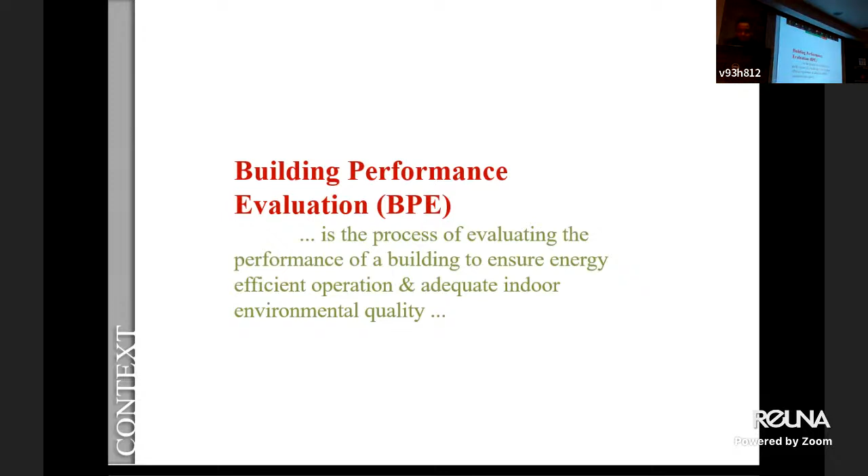So to answer this question, why we need building performance evaluation. To put things in context, in the context of this rapidly changing climate that we all are experiencing on a day-to-day basis, let's start with Chile's commitment to carbon neutrality. Sometime back, Chile announced decarbonization of its electric sector to achieve carbon neutrality by the year 2050. Okay, I'm sure all of you are aware of that.

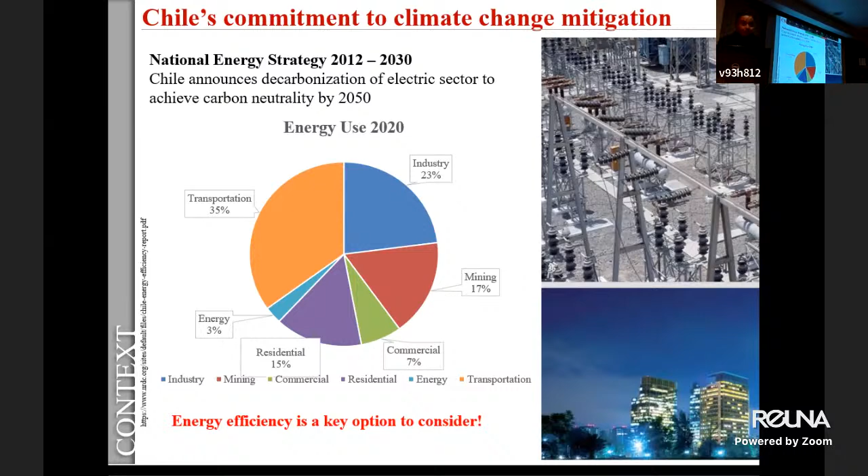So how does building performance evaluation fit into the context of building design process? Let's take a step back and ask ourselves, what is our prime responsibility as architects? I think our responsibility is to build efficient buildings and comfortable buildings. So how do you ensure that?

We have to put our hands around tangible issues and start quantifying the impact our design decisions make, both on the environment as well as on the occupants who inhabit our buildings. So all of a sudden, building performance becomes an objective equal to the more traditional items such as cost, schedule, quality assurance, and concepts such as research, simulations, calculations, energy modeling - all those things you do in your environmental control systems class now become core problem-solving tools that you can use to analyze data.

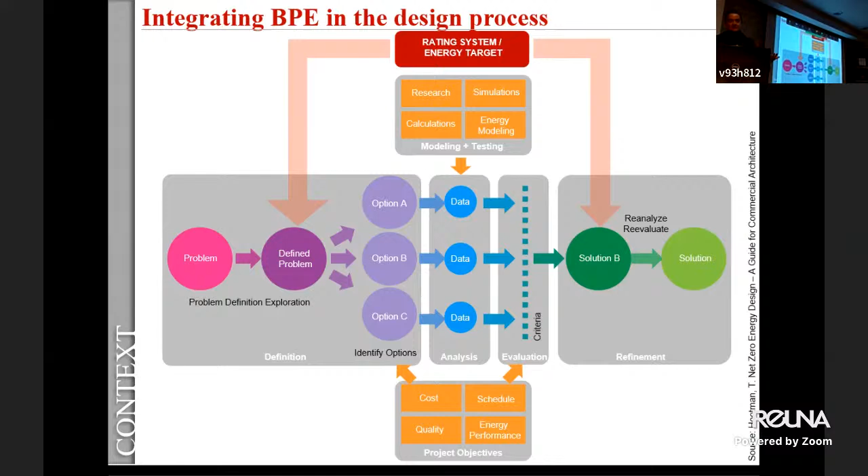There are various types of modeling software available to you to conduct simulations. For example, you have tools to evaluate climate analysis, to conduct climate analysis. There are specialized software that you can use to evaluate different aspects of building performance.

These include things such as evaluating the performance of a building envelope, evaluating the thermal comfort conditions of the spaces that you design, natural ventilation potential of your buildings, and daylighting potential of the spaces that you design. Then there are some extremely powerful software programs available to you that conduct whole building energy simulations at various stages in the design process.

So these are just some examples that you could use for your building performance evaluation. But mind you, the list is really not complete out here. These are just examples.

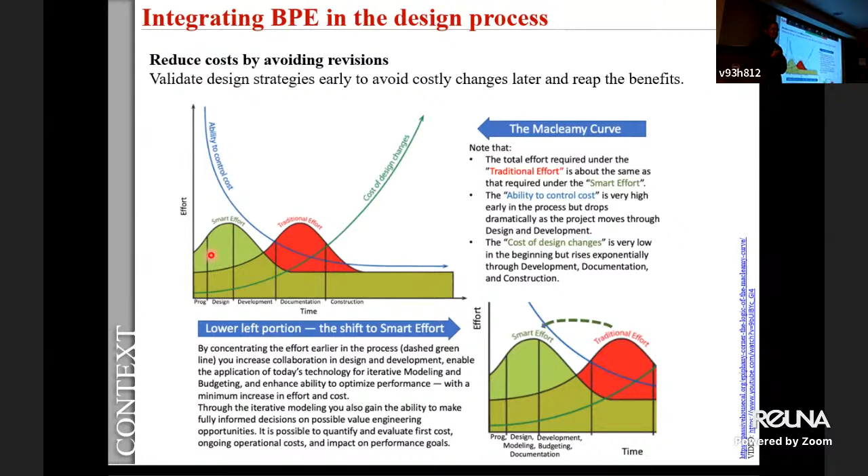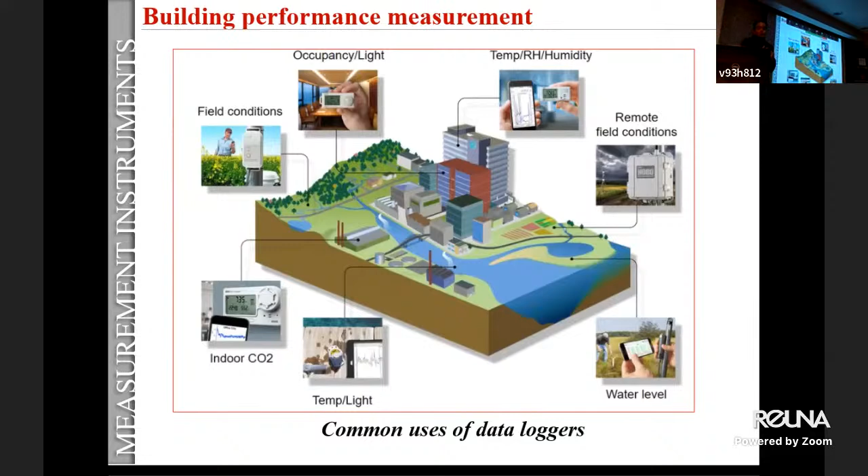You can also measure how a building performs, and for that you would need instruments such as meters and data loggers. For example, if you want to measure carbon dioxide levels, you can use this particular meter right here. To measure illuminance, you use what is known as a light meter. If you want to measure acoustical performance of a space, you use a sound meter. So these are different measurement tools, instruments, data loggers that are available for you.

And while there has been a considerable focus on measuring and regulating resource efficiency of buildings, there has been very little attention paid to the issue of how well buildings meet their design intents for occupants.

Building occupants such as yourself represent this wealth of information that tells the designers how well the building actually works. The challenge for the designer is to collect this information in a systematic and meaningful manner.

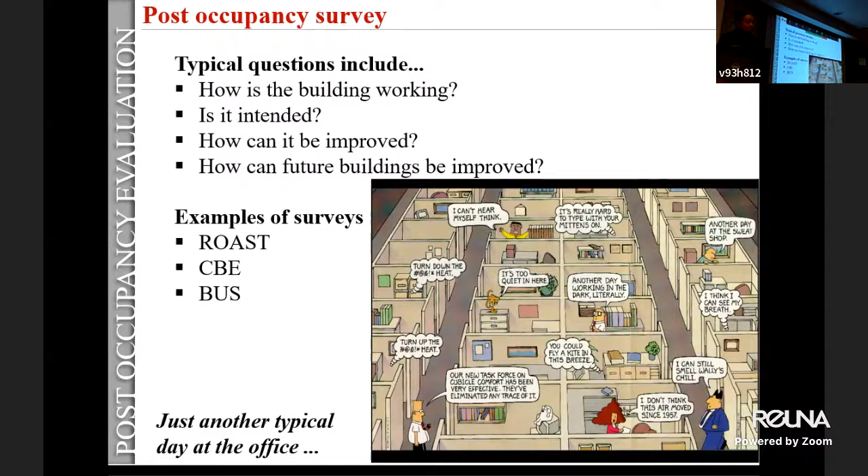So in order to evaluate occupant behavior in our buildings, we use what are known as post-occupancy evaluation surveys. Here is a note on one such survey known as ROAST, developed and maintained by Kieran Timberlake, an architectural firm based out of Philadelphia. ROAST lets you assess or evaluate thermal comfort in a workplace.

Through different questions posed by ROAST, it captures and maps occupant feedback onto your building's floor plan and provides you with visual data, which you can use to inform your design decisions and identify trends to make informed improvements.

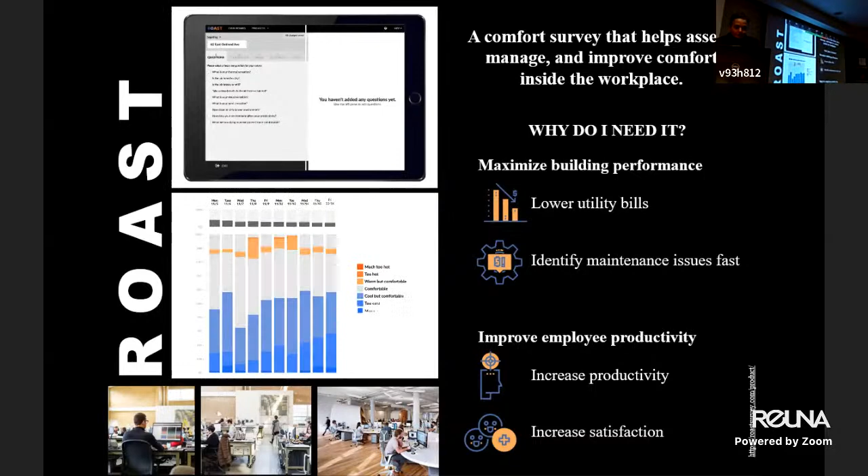You can also evaluate the performance of exterior spaces around your buildings, typically used in university campuses and urban areas. These spaces need to be designed and optimized both for use as well as enjoyment, and they come with their own challenges.

For example, you have climate, which can't really be controlled, so that complicates the assessment process. And unlike buildings occupied by tenants with a fixed profile, all sorts of people come and go in these spaces at all sorts of times, making user surveys extremely difficult to control.

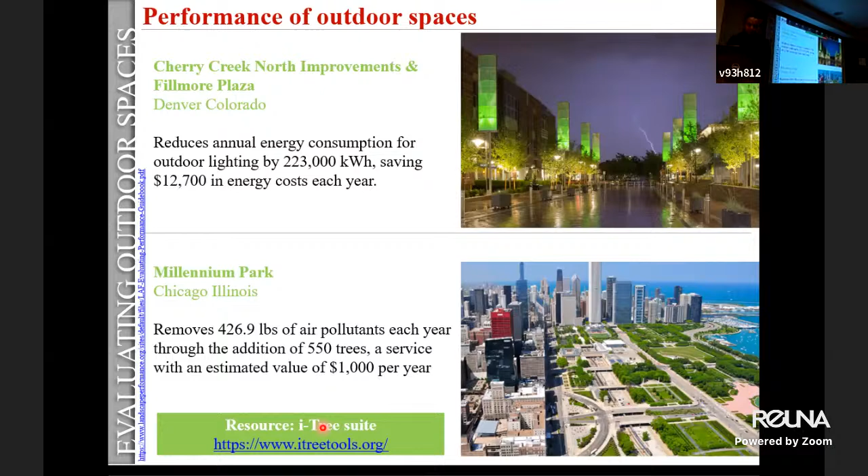Building performance evaluation is also extremely important in the green building design process. Design teams are actually required to conduct a building performance evaluation to demonstrate compliance with different rating systems. For example, to ensure energy efficient operation, more recent versions of LEED and the Living Building Challenge actually require

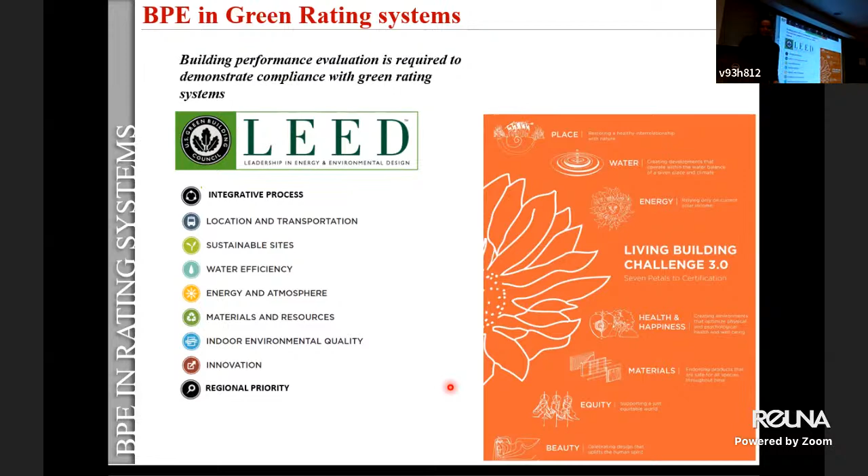actual energy performance of the building, in addition to the simulated or anticipated performance of the building. And it has to be demonstrated over a period of 12 months after the occupants occupy the buildings.

So in this next set of slides, I will show you examples of different building performance evaluation methods that we use to inform design decisions. Here is a project we did as part of the Green Team at Kirksey, for Houston Community College - the Learning Hub and Science Center.

This project is an example of how daylighting simulation software can be used to effectively inform design decisions. The facility houses a welcome center, a library, certain science laboratories, and meeting rooms. The design team conceived the facade to be a billboard that showcases the activities within the building.

So all public spaces within the building have a visual connection to the outdoors, as well as views to the rest of the campus. Okay, so that's the facade right there.

Now, unfortunately, this billboard facade and this connection to the exterior came with a price. The main facade, as you can see in this diagram, faces west, because of architectural constraints. So the design team realized there could be serious issues with both low angle sun entering the space, as well as glare.

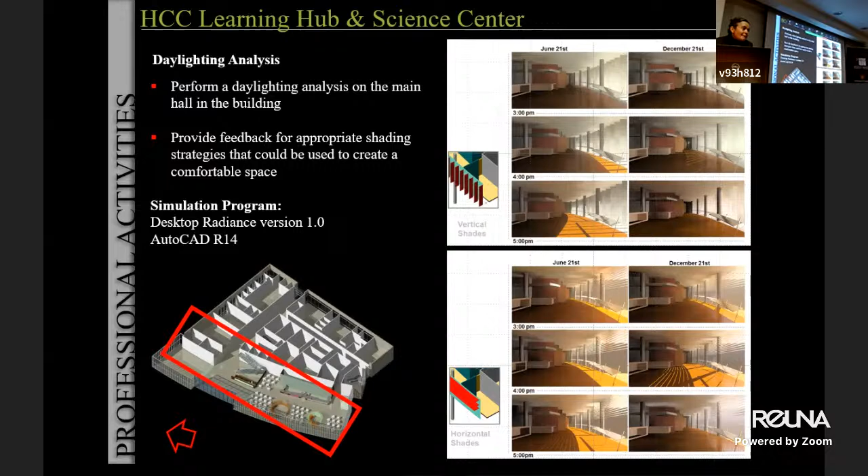Here's another project that one of my students undertook in 2017. This study challenged the criteria of the LEED rating system at that time addressing the issue of glare.

As part of their responsibility in the integrated design lab, the students were evaluating buildings attempting to comply with LEED. The buildings seemed to be passing and meeting the LEED criteria for both daylighting and views, but at the same time we were having numerous complaints about glare in these buildings.

This led us to perform simulations as well as post-occupancy evaluation surveys. We were trying to conduct both simulations and POE surveys of a LEED certified building to see what was going on in the building, and to use that information to inform the criteria used in LEED for certification.

For this study, we examined Jabs Hall, a LEED certified building on the MSU campus, and assessed the building in terms of its performance with regard to both daylighting and glare.

As part of the study, we compared the results from all the procedures we had to follow to comply with LEED requirements with independent evaluations of glare using simulations and post-occupancy evaluation surveys. We concluded that the illuminance simulation option provided in the current version of LEED was not sufficient to adequately address the issue of glare.

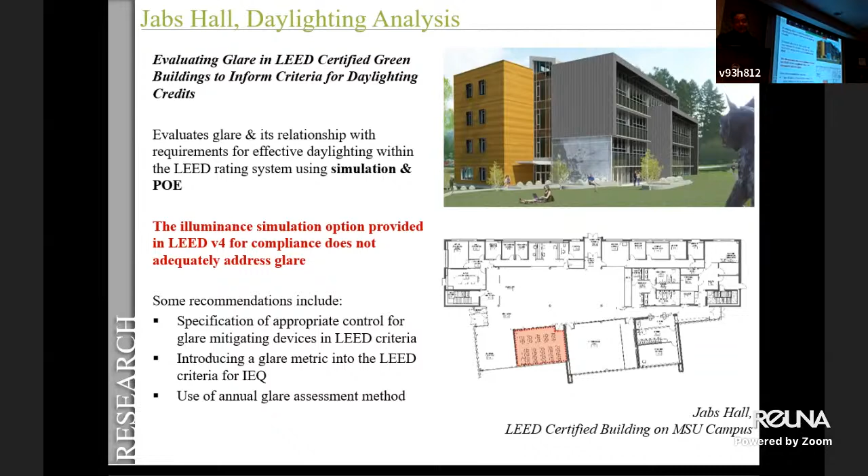We recommended the introduction of a glare metric into the LEED criteria or process for complying with daylighting requirements. We also recommended the mandatory use of an annual glare assessment method in the compliance process.

Here's a snapshot of the analysis conducted for the study. We have a web-based post-occupancy evaluation questionnaire developed using Qualtrics software.

This questionnaire was distributed to the faculty and staff of the building and required them to evaluate their overall satisfaction with both daylighting and glare conditions, based on their experience occupying these spaces during summer, spring, and fall semesters.

We also conducted point-in-time and annual glare analysis, and found that glare occurred not only from exposure to the southern sky, but also from mullions, white walls, desks, and exterior surfaces surrounding the windows.

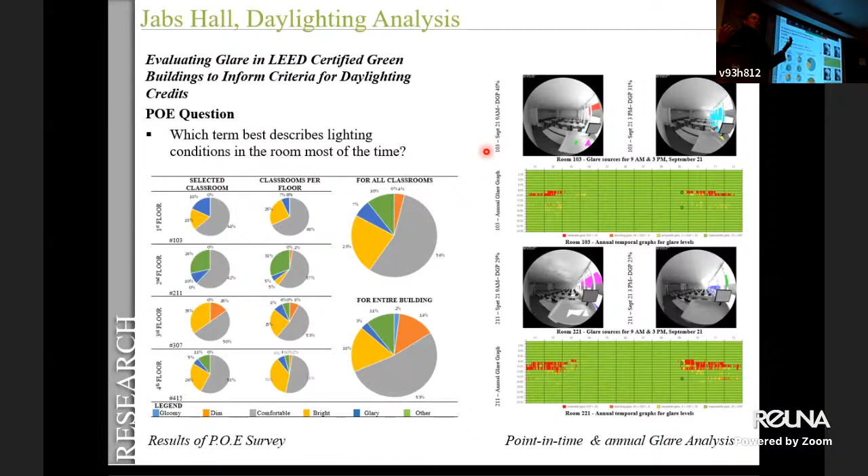When we compared annual glare graphs to point-in-time graphs, we found that point-in-time glare rating systems were insufficiently representing the full range of glare conditions, and therefore their use could be misleading in understanding the annual glare potential of the space.

Now, here's another project that I think could be of interest to you, and this is one of my favorite projects. It is a study on tiny houses.

For those who don't know, the tiny house is a class of residential buildings that is less than 40 square meters, or 400 square feet, in area. These types of buildings can be seen as potential models for affordable housing.

This model of housing can potentially also address the issue of homelessness by providing an option for transitional housing for homeless populations. The idea is that moving homeless populations into such housing models can save a lot on healthcare costs, emergency room services costs, and hospitalization costs typically incurred by city officials or the agencies responsible for addressing this issue.

The School of Architecture at MSU is currently working with HRDC, the Human Resources Development Council, a regional council in Montana involved in such activities, with the goal of providing such units to the homeless populations in Bozeman, Montana.

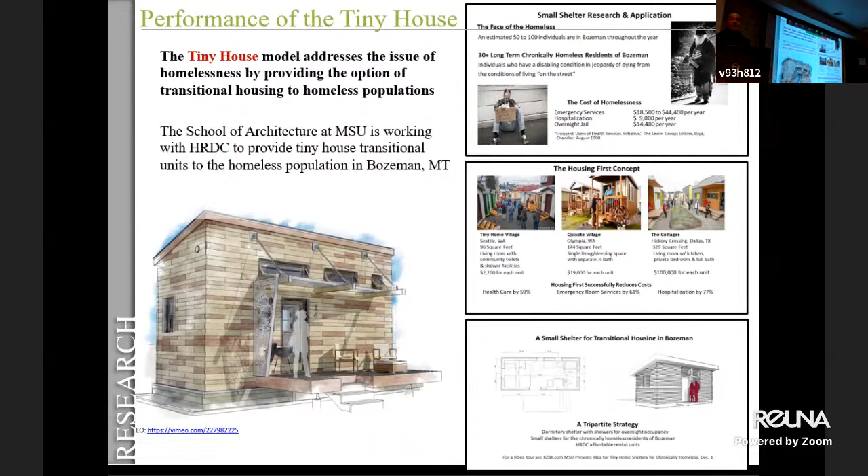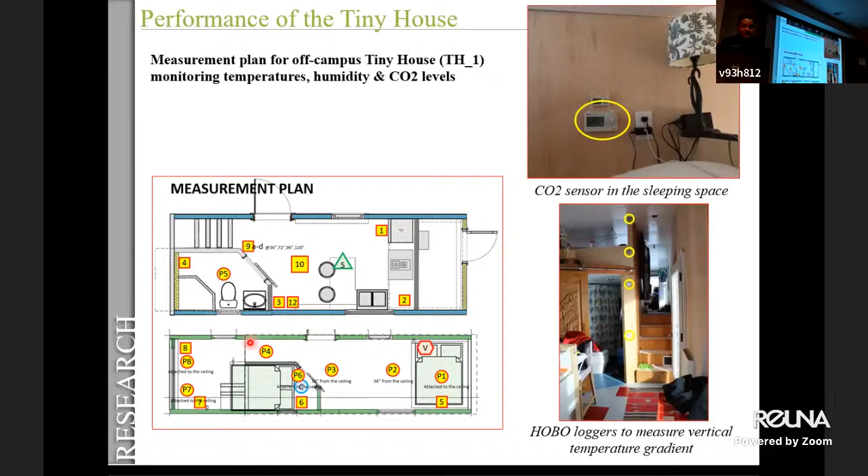In the first leg of this project, we monitored the indoor environmental quality of two tiny homes built in Bozeman. This is a measurement plan for an off-campus tiny house, developed to monitor temperature, humidity, and CO2 levels. A similar measurement plan was developed for the tiny house constructed on campus.

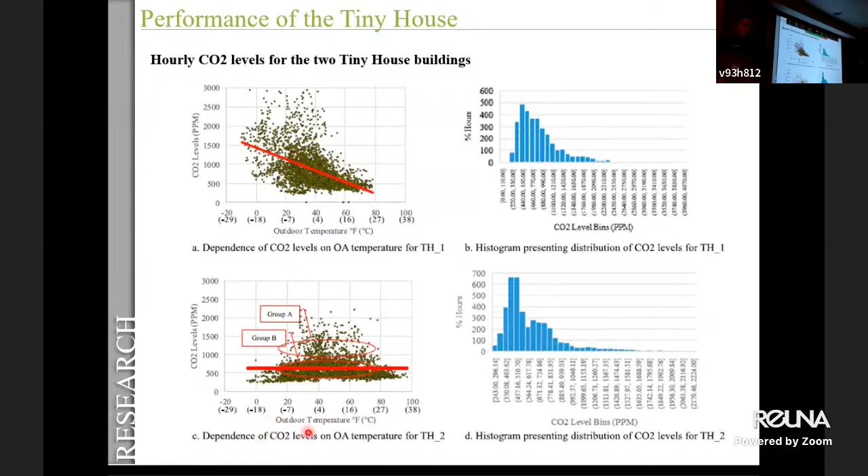In the first house, elevated CO2 levels were observed when outdoor air temperatures dipped, which informed us that the ventilation system was inadequate for this particular house. On the other hand, in the second house, CO2 levels were independent of the outdoor temperature levels.

Thermal images were also taken for both houses on cold winter nights, and these revealed conditions for thermal bridging and infiltration that cannot typically be seen by the naked eye. These images helped us identify construction issues that could be improved in the next iteration of the tiny homes.

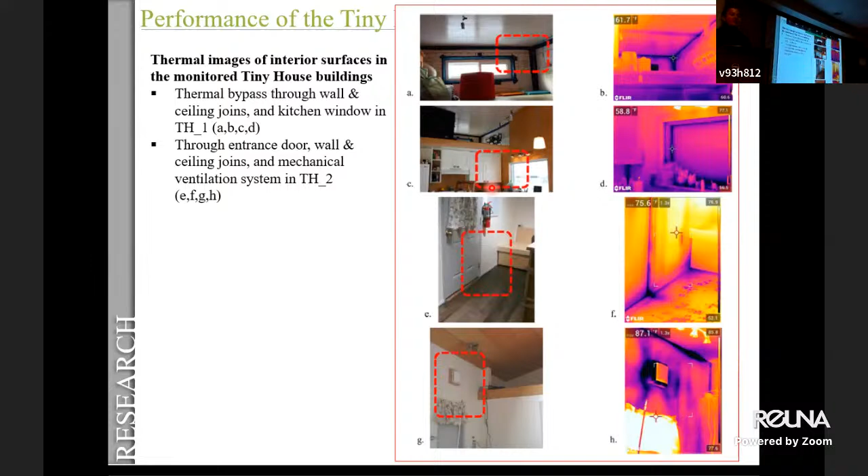The next step of our study was to provide recommendations to improve the design, construction, and operation of tiny homes that would both reduce energy consumption and ensure appropriate indoor environmental quality. Different strategies for envelope, ventilation, as well as passive heating and cooling were tested.

The specifications of many of these strategies were adopted from the passive house standards, which I'm sure many of you are familiar with. A calibrated whole building energy simulation model was used to conduct this analysis, both in terms of energy efficiency and how well implementation of these strategies met the indoor environmental conditions of the space.

We also recommended implementation of passive ventilation strategies to address overheating issues observed in the first stage of our study, as well as minimizing the use of windows, keeping window sizes within 10% of the floor area. Finally, we recommended hybrid passive cooling strategies, such as the evaporative cooler, to address cooling requirements in the short summer months in Bozeman.

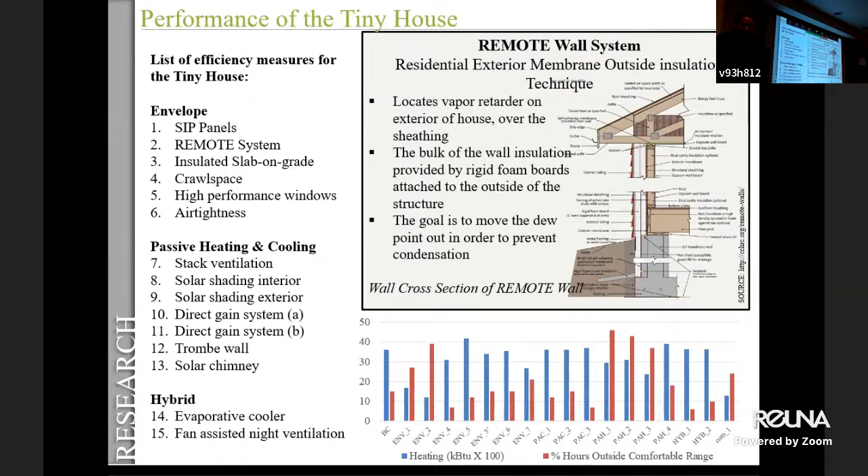Here's another project where indoor environmental quality was measured and energy consumption was monitored. This project was sponsored by the EPA P3 program. The goal was to evaluate the physical performance of LEED certified green buildings in terms of energy consumption and indoor environmental quality.

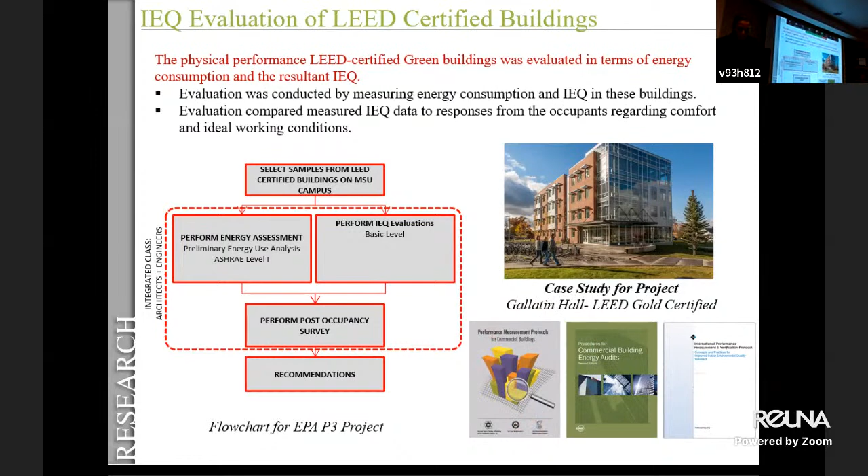For this study, we had teams of engineering and architectural students participate in the evaluation process. The engineering students conducted the energy evaluation, while the architecture students conducted the IEQ evaluation of two LEED certified dorm buildings located on MSU campus. We used performance measurement protocols published by ASHRAE, and here is a snapshot of some of the results obtained from the measurements.

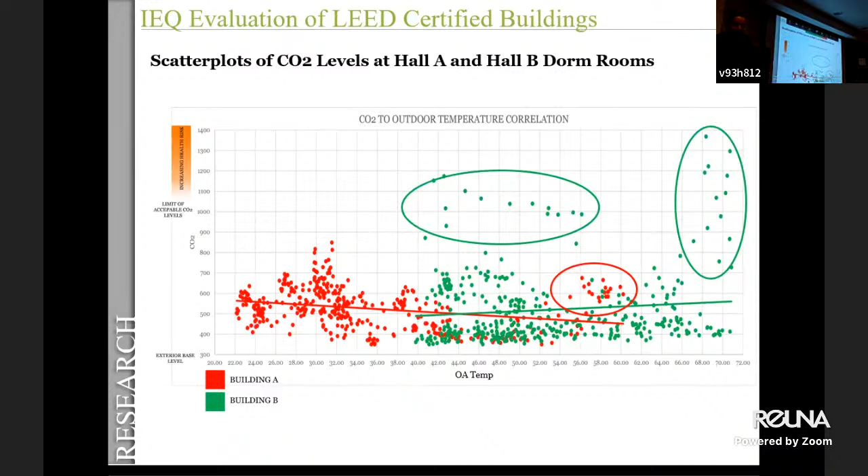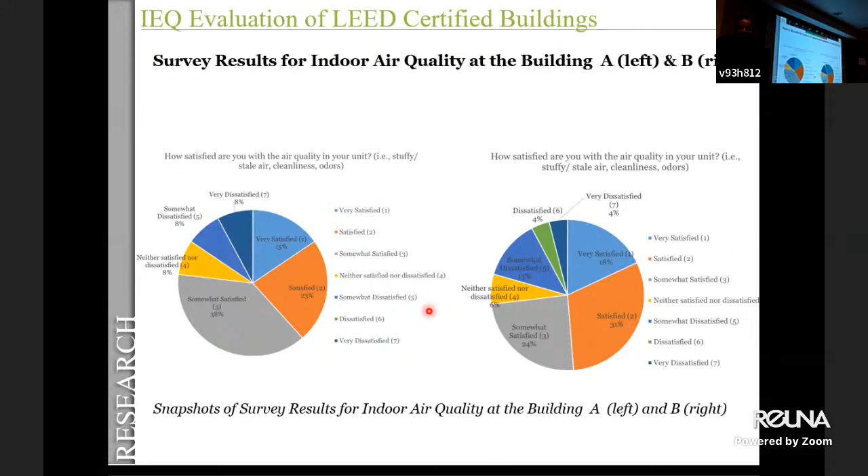Now, a totally different trend was observed in building B, which does not have forced air systems, but has baseboards that serve the dorm rooms. So the absence of a forced air system delivering ventilation air to these spaces caused major spikes in CO2 levels at all instances of outdoor air temperatures. Here is a snapshot of the post-occupancy evaluation conducted for the two buildings.

In this final leg of the presentation, I have prepared some additional slides that I would like to present to you. The intent here is to give you some ideas of suitable passive design strategies that you can apply in your buildings in order to reduce energy consumption and improve IEQ.

I would like to share with you three projects. They're not my projects—they are something I show my students. One of them is based in India, and two of them are from the United States. All these projects showcase some of these design strategies.

Before I move on, I would also like to point out that these projects are located in the Northern Hemisphere. So I will be talking about the southern sun, or southern orientation, as a source for heat, rather than the northern orientation that all of you are familiar with in Chile. Mind you, there is going to be a switch.

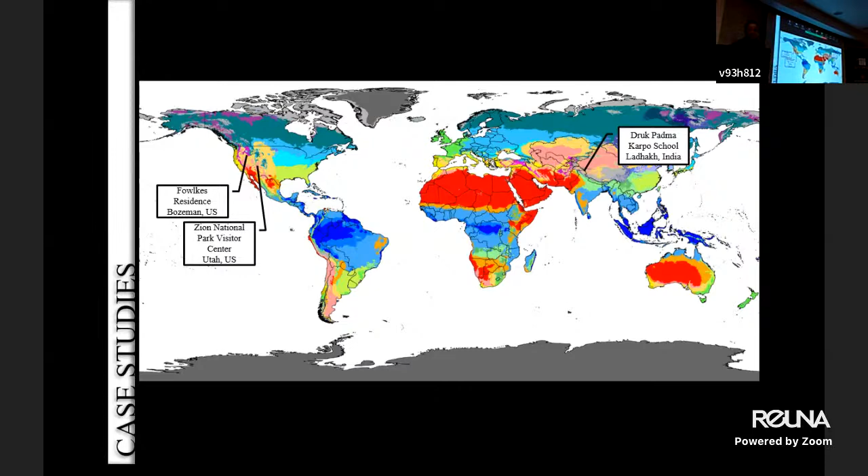This first project is the Druk Padma Karpo School, a net zero energy school designed by Arup. I'm sure many of you know Arup, which is an MEP firm. This school is located in Ladakh, India.

To give you background about Ladakh, it is a very remote region of my country, located at approximately 10,000 feet, or 3,000 meters above sea level, on the leeward side of the Great Himalayan and Great Zanskar ranges. This makes Ladakh a very arid climate with very intense solar radiation—hot and dry in summers, cold and dry in winters.

For the residential building blocks, an indirect passive solar gain system known as the trombe wall was selected to provide heating for these spaces. The trombe wall faces the south orientation and is coated externally with black heat-absorbing paint, and faced with a double layer of glass. The wall gets heated during the day, the heat gets trapped by the glass, and the heat stored in the wall then gets conducted inwards to the dormitories at night. That's how a trombe wall system works.

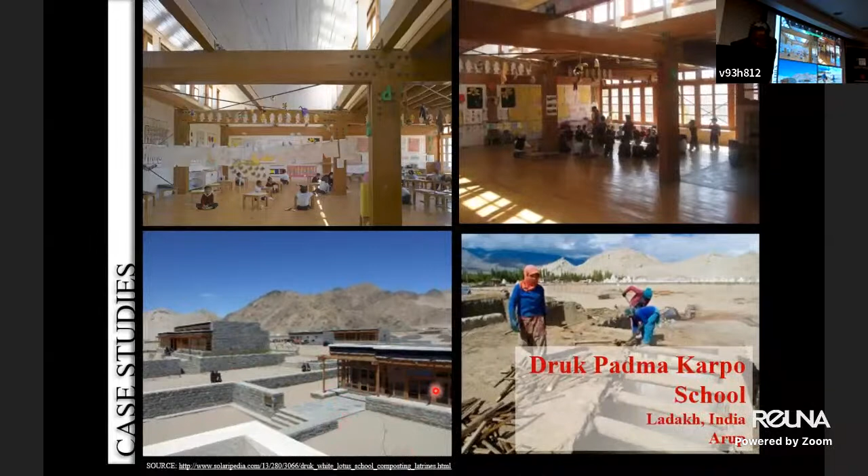In this next example, I want to show you a residential building in Bozeman, Montana, designed and built by Charless and Marjorie Fowlkes in 1976. The goal here was to heat this house using renewable energy, with the sun providing 75% of the space heating needs.

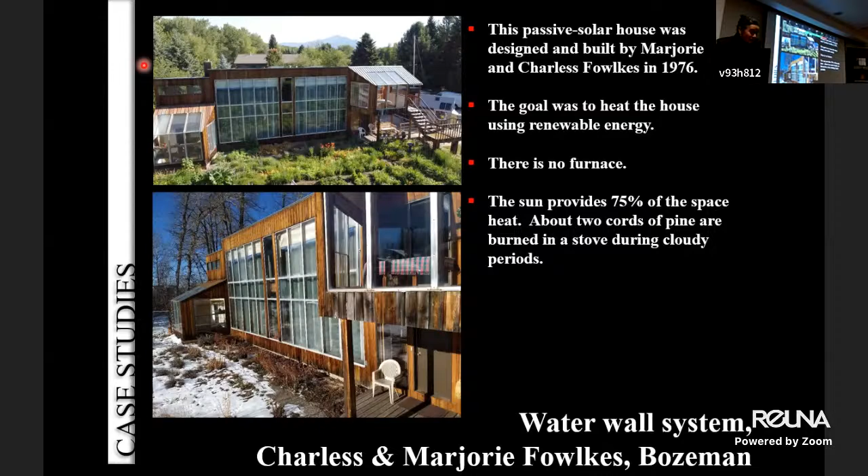For those familiar with Bozeman, Montana, it is a cold, harsh climate. In a few slides I will show you the temperatures. There is no forced air heating in this house—just a little stove that provides supplemental heating.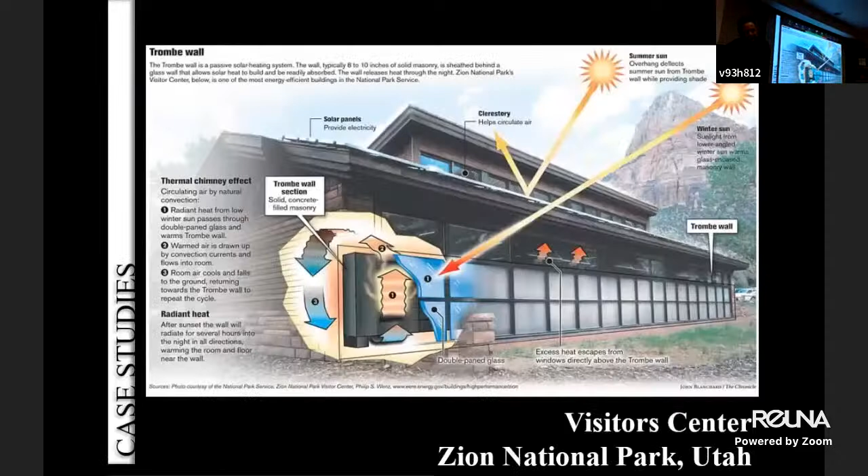Yes, I do. It's, I don't know, it's a circulation system? No. These are huge, and I have the sizes in my paper, published by Charles and Marjorie. They calculated how much volume was required to maintain the space conditions of this house. These are double-storied water walls, and the water is not actively circulating. It does circulate inside, but you don't need an active system that circulates the water. But at some point you need to renovate the water.

Since 1976, I asked. Is it the same water? Same water since 1976, you don't want to drink it. Interesting. I have a video, so when I share the presentation, you will see it and hear more from Charles about how it's controlled and how he got hold of these double-height water columns.

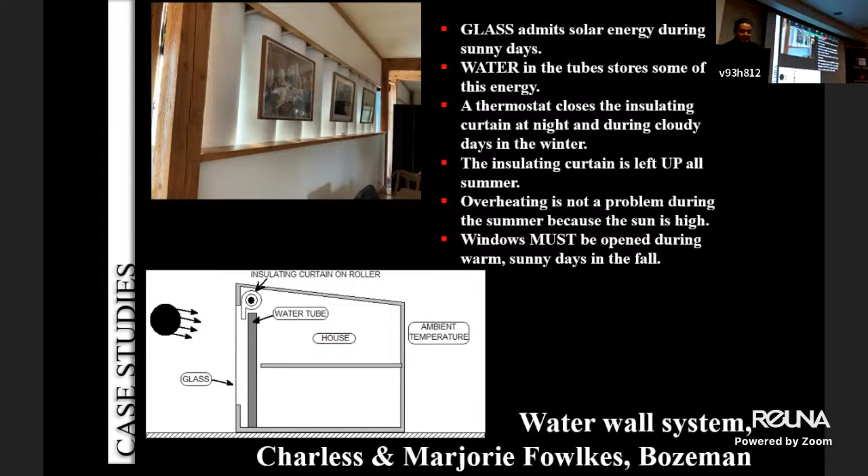That's a nice comparison you just made between water and concrete, an easy way to understand the capacity of water. And that is why we have...

So it's a very nice comparison between water and concrete, an easy way to understand the capacity of that material. That is why we usually see water in our systems here - all the radiators on campus use water, all the solar collectors use water, because it has a very high heat carrying capacity. In cold climates, because water freezes, you have an issue, so people mix glycol with water, which reduces that heat carrying capacity, but you have to do that to protect the system.

Any other questions? Yes.